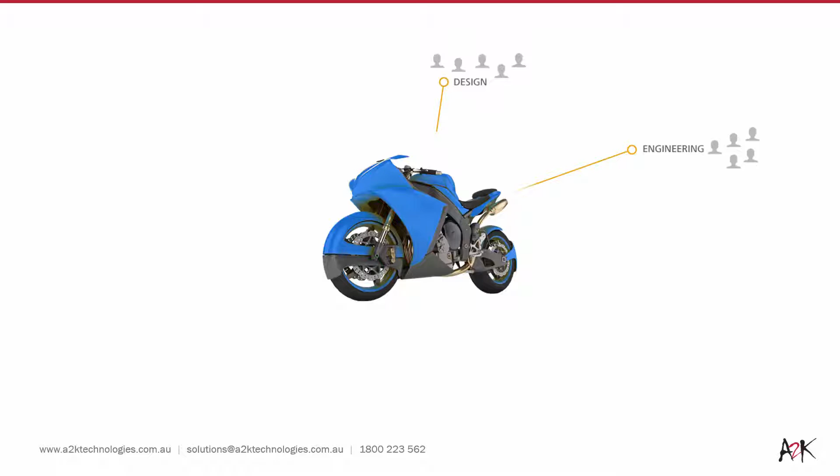The design software industry has typically served this target audience, the designers and engineers. But when you think about it, there are all kinds of other people that contribute to executing the whole project. And all of these people use different tools, and all of those tools create different artifacts and different kinds of data. And all the conversations, activities, and decisions that happen, which if they are even captured at all, create even more stuff to keep track of. Dealing with all this information can be time-consuming and in most cases inefficient. What's been missing from the design process is a good backbone to the infrastructure that manages all this.

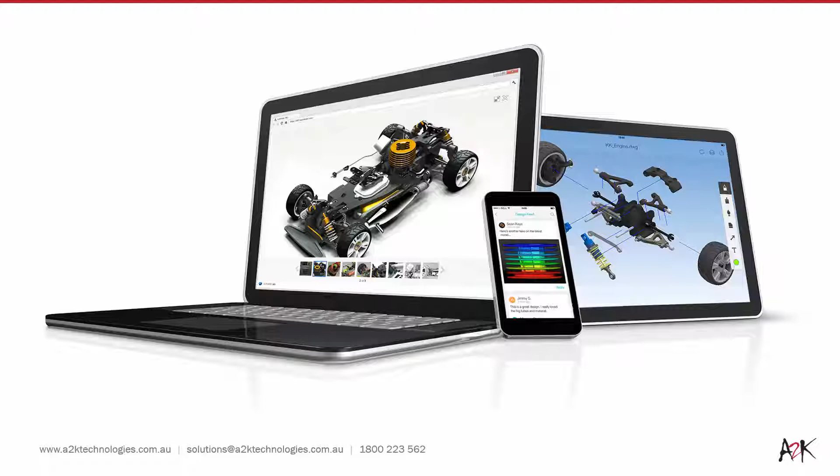Autodesk A360 has been developed to give people access to all the data, projects, and people that they work with on a daily basis. It provides a centralized workspace for design and engineering projects and acts as a platform for general project collaboration, as well as other Autodesk cloud-based services such as some of the existing A360 design, analysis, and rendering tools. This workspace is also accessible on just about any device at any time, whether it be desktop or mobile devices such as tablets or phones. The mobile platforms currently supported are iOS and Android. So let's take a look at the new Autodesk 360 platform.

A360 places the project at the center of the workflow. It connects people, centralizes data access regardless of the primary design tool, and records activities all in a single location. It organizes and provides access to all project information, not just design data. And it offers a simplified and easily accessible user experience on every device, bringing this information to the full project team. It's not just for designers, but for everyone, available anywhere, at any time, and on any device.

A360 comes in a number of flavors. A360 Drive is the free Autodesk file storage service which has been available for a number of years now. This was the previously named A360. It has very limited functionality compared to the other flavors, but still serves as a great file sharing tool. A360 Free is the new A360. It contains a number of the newer features such as limited project management for personal use. As you can see, it has limited storage capacity and only allows for a single project at a time.

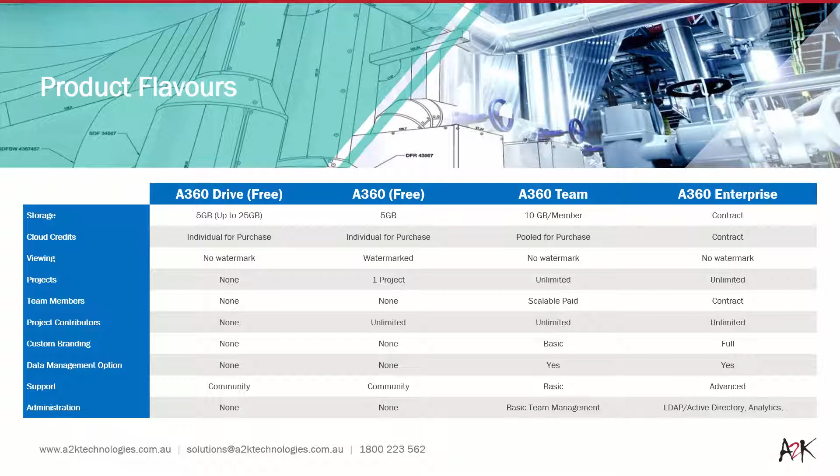A360 users are classified into a number of roles. The first group is for team. Team roles are specific to the overall portal. There is the team owner, who controls the entire A360 account, the team administrator, who manages the users and projects, and the team members, who are regular users that can join projects. When getting down to the project level, there are project owners, who are the project administrators, project moderators who manage the project, and the project contributors who are external users such as consultants and contractors who need to contribute to the project. To make the distinction clear, team members are internal staff and project contributors are external users.

When first logging into an A360 hub, the user is presented with their dashboard. Looking more like a social media service, the dashboard provides the user with the most up-to-date information. From here, the user can start drilling down to project-specific information. At the project level, information such as design files, scheduled engagements, and other communications can be accessed.

In essence, it's a mini hub. All project data, whether it be 2D or 3D, documents, photos, etc., can be uploaded into an organized data repository. Built-in viewers will allow the viewing of over 100 different common file formats, all without having to leave the A360 environment. Models can be viewed using Autodesk's new and powerful model viewer.

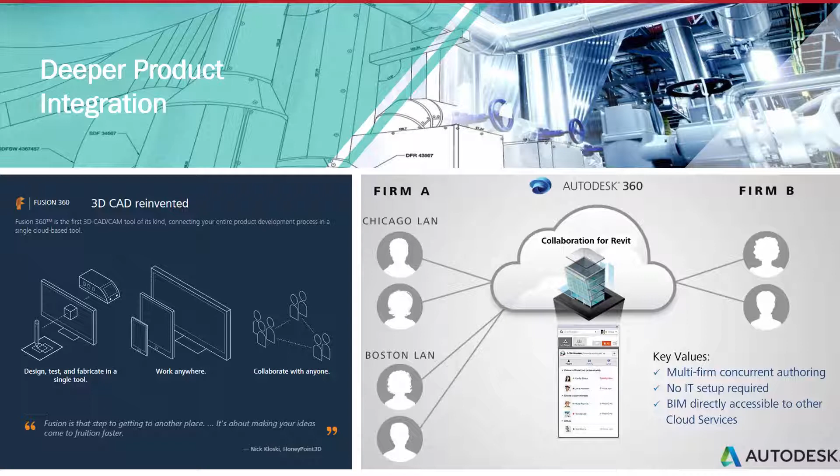A360 will also have deeper integration with Autodesk design authoring tools. Products include Fusion 360, which is already available, and Collaboration for Revit, which is currently North America only, but will be released in the ANZ market in time. The A360 platform provides the mechanism for other modules that extend the design capability to now be built on top.

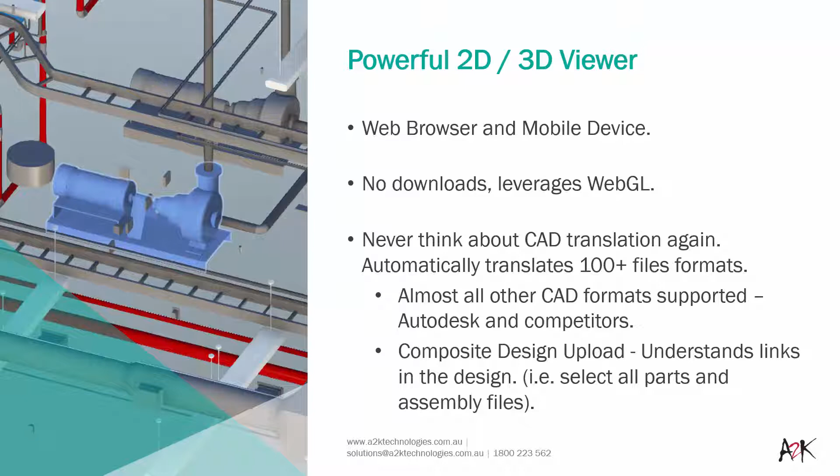To enhance the platform, Autodesk has been developing a brand new model viewer built specifically for A360. Without even needing to download any software or browser add-ons, other users such as clients will be able to effortlessly access design files through their web browser. Thanks to over 100 file formats being supported, models from leading software developers, not just Autodesk, can be accessible.

When users are reviewing models, comments can be added directly to the model elements to ensure the design process remains as seamless as possible, with additional markup capabilities coming in the near future. The next time the model is opened by another user, those same comments will become immediately visible. And lastly, all model metadata is searchable. This provides rich interaction with the project files, bringing visuals and data together as a single experience.

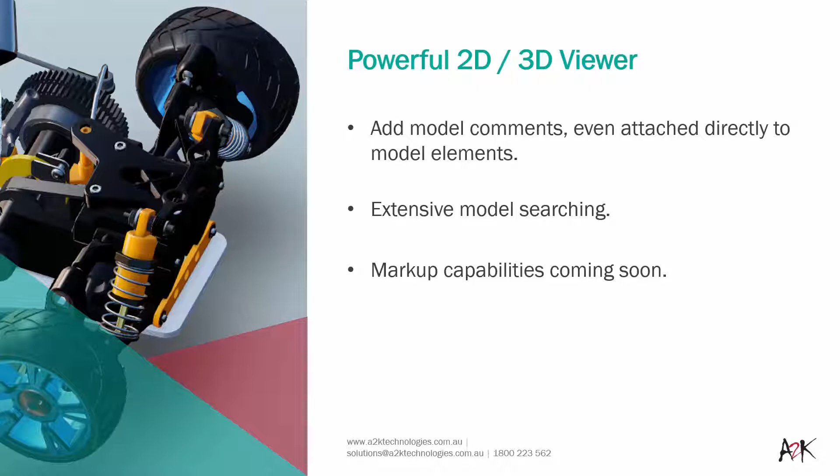You've no doubt seen or currently use various file sharing services, and these are great if all you need to do is share files with the project team. A360, though, provides the same simplicity of those other file sharing services, but with the added muscle to interact with your designs in more meaningful ways. Let's now take a live look at how all this comes together.

We are looking at the A360 user interface through a web browser. As you can see, we're currently on our All Projects tab. When we move up to the top right-hand corner, we can access our user account details. This location contains a list of all the hubs that we are connected to. You can currently see that I'm connected to the A2K Technologies hub as well as my own personal hub.

To the left of my profile button is the notifications. This contains a list of all the old and current notifications that I've received. You can see the only outstanding notification that I have is currently highlighted in orange. We can select one of the project links to take us to that project's homepage.

To the left are links that take us back to the homepage, to where the data is stored, the people that are currently connected into this project, the calendar, and any wiki pages that you need to access. In the center is the activity feed. This contains a list of all the activities that are currently being undertaken for this project. Let's scroll down to the bottom until we get to the very first activity.

As you can see, I've taken it upon myself to start the project. After the project was started, the lead architect was then invited into this project. After the lead architect accepted the invitation to join the project, they went to the calendar and started a kick-off meeting. They then invited the lead engineer and myself to join.

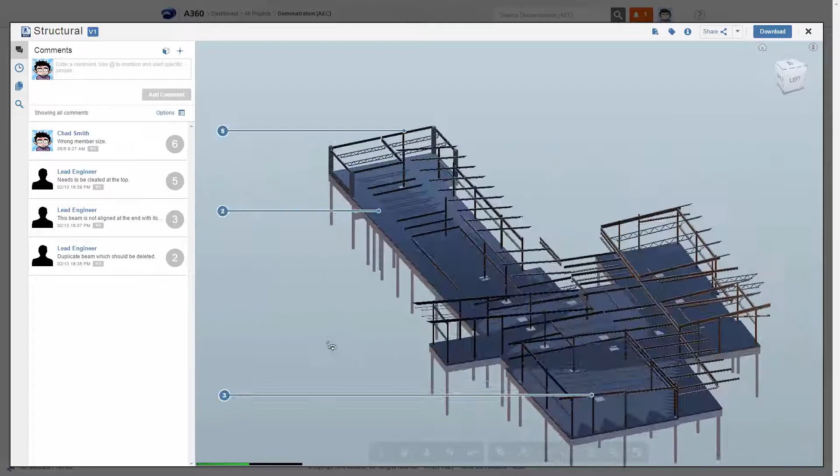As we can see, this model is not just static, it is interactive. Note that the performance of the model is quite good, especially considering this is within a web browser. The model viewer has been designed to handle massive data sets, so opening up those large project files shouldn't be an issue.

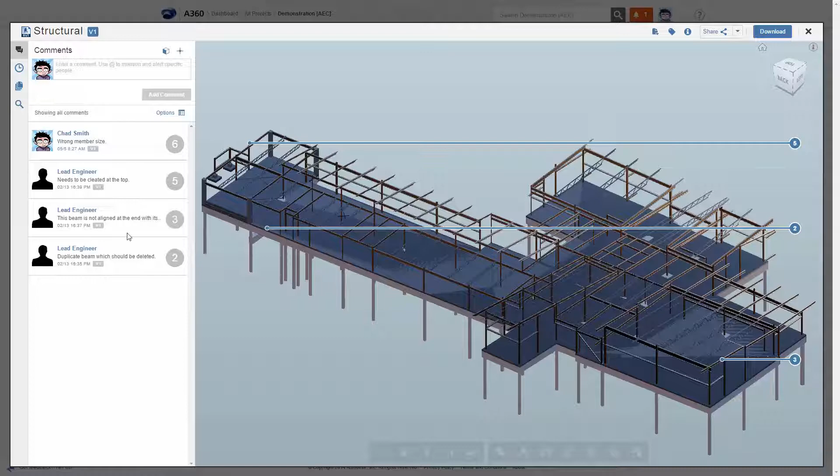Towards the right-hand side of the model, you can see some comment tags. These comment tags match up with the tags as noted over on the left-hand side where you can see the comments. When selecting the comment tags from the list, the model is reoriented to represent the model as it was when that comment was saved. You'll notice that the objects are also highlighted. That's because these particular comments have been noted as an object comment.

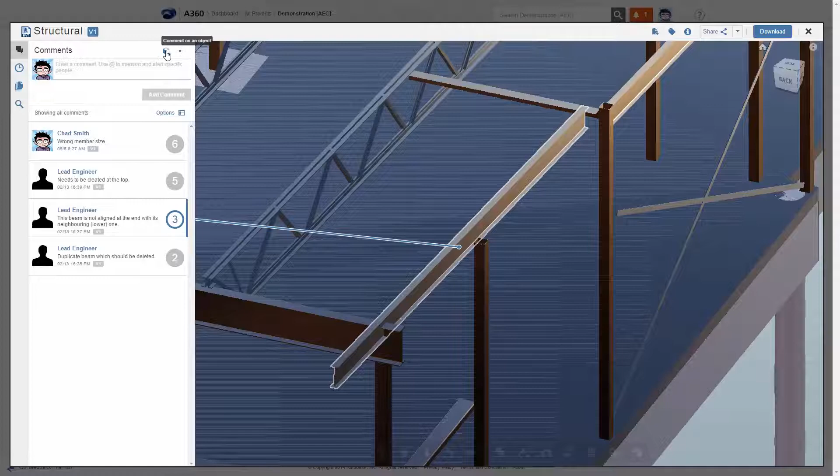Selecting comment number 5 once again reorients the model to show us the context. You'll note in this case that the comment is actually pointing to the top of the object rather than the center. That's because this type of comment is a point comment and allows us to pick an arbitrary location along an object as its reference.

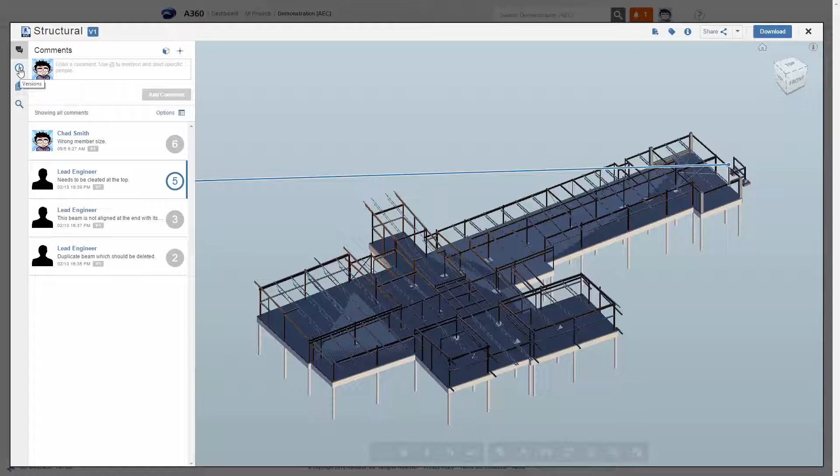Over on the tabs on the left, we have a version tab. This will show us all past versions and the current version for this model. Over on the left is also a search tab. This allows us to put in keywords in order to find those objects based on the object's metadata. In this case, we'll use the word girder because this is a known property as part of a Revit model.

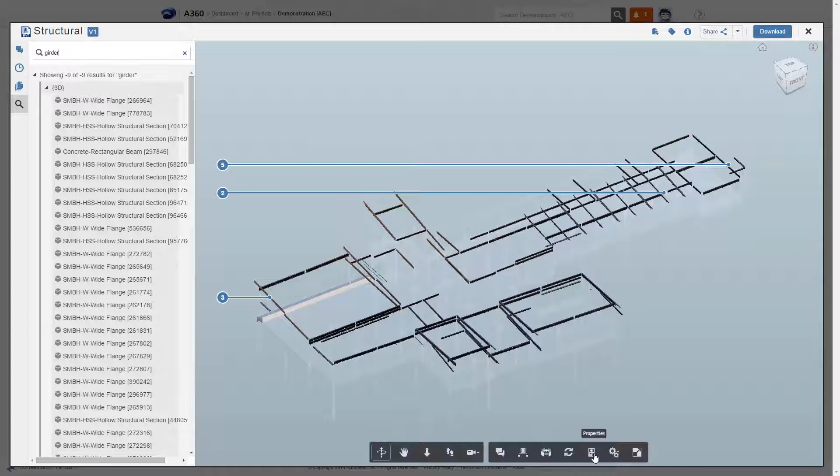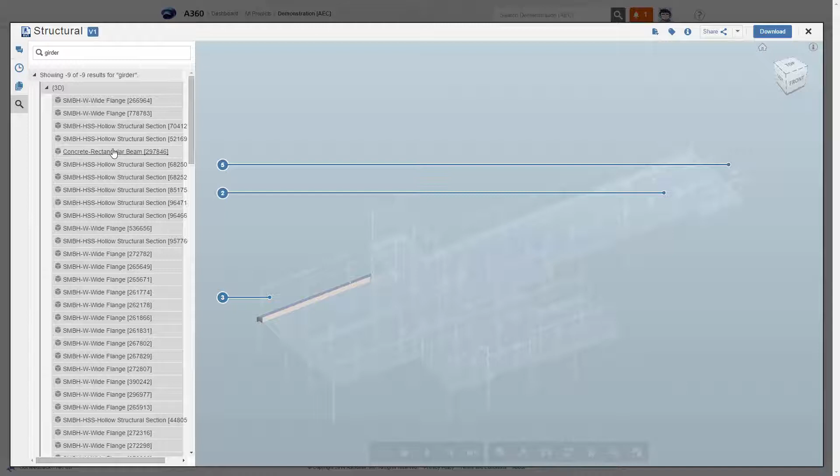Once the search is finished, you can see the found objects have now been isolated in the model view. We can confirm this by turning on the Properties palette and then selecting an object. As you can see, this object has the word girder in it. As we hover the cursor over the search results, those objects are then highlighted in the view. If we select those objects, then the model view zooms into the object.

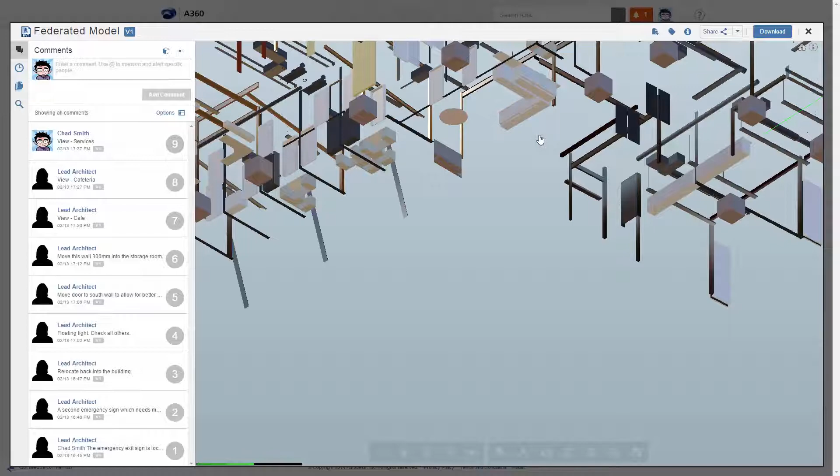Going back to the activity feed now, we're going to scroll back to the top of the list and select one of those featured files. This happens to be a federated model of all disciplines for the project. This project contains a lot more information and therefore takes a little bit longer to load. But once it's loaded, you can see there that the performance is much the same as the structural model that was previously opened.

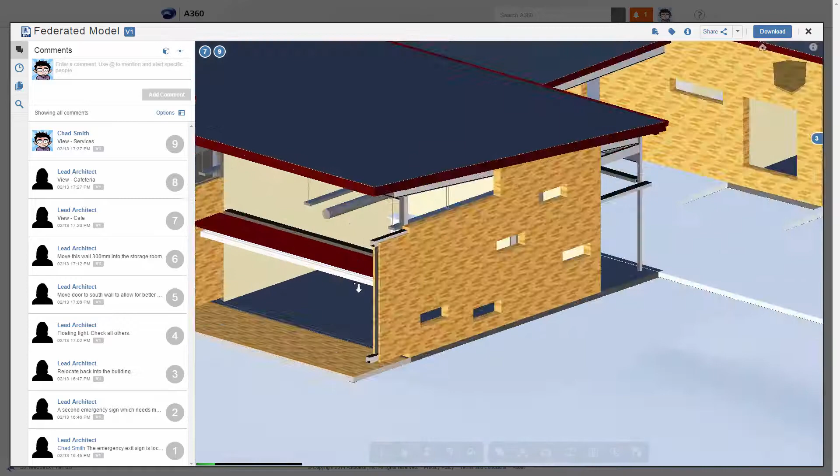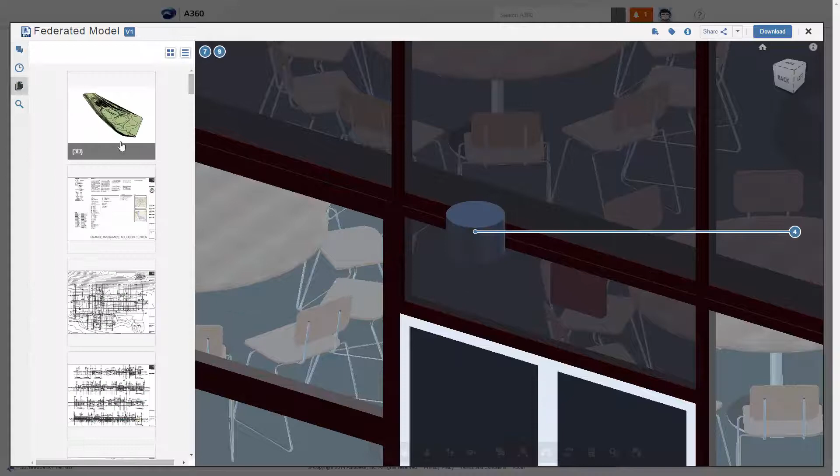This project also shares some similar characteristics, such as the comments that are listed over on the left-hand side. This Revit project, when it was uploaded into A360, also had some sheet views generated as part of that Revit project. You can see that those sheet views have been generated into interactive views as listed on the left. Selecting the sheet view will open it up, and it now becomes an interactive view. You can see the fidelity of the view is retained as this is a vectorized view.

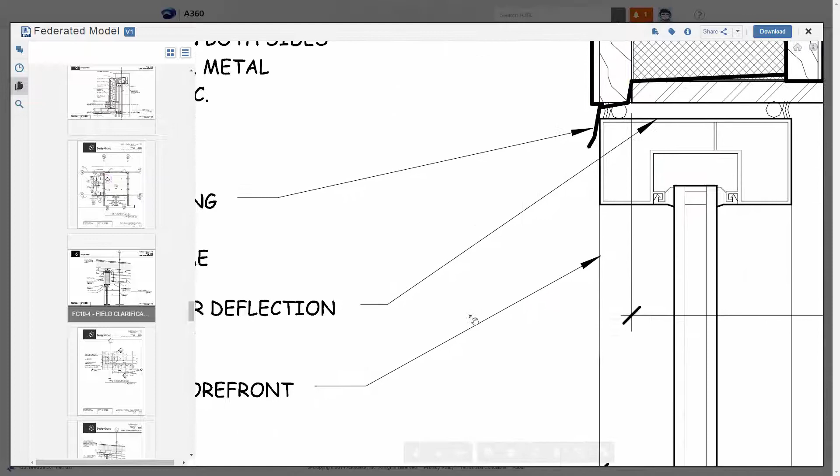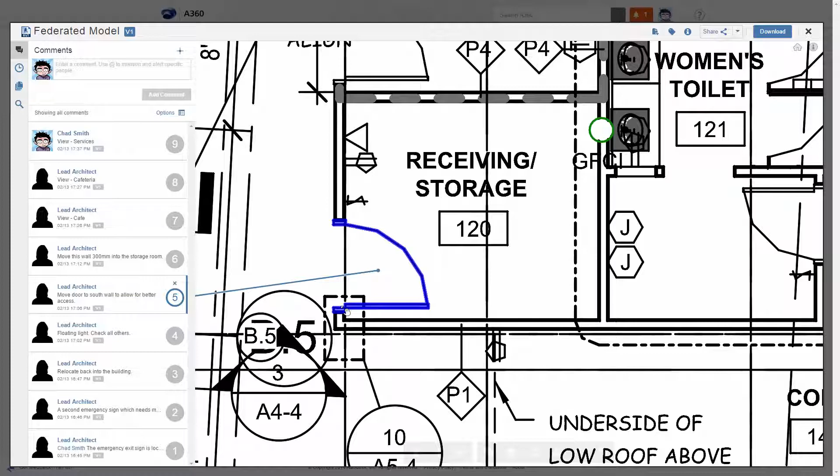This model also contains some comments that are related back to these sheet views. You can see, despite being on a different sheet, when we select the comment, it takes us to the correct sheet, zooms in, and shows us that object. You'll notice that these objects are also modeled objects, so that we can select them as well.

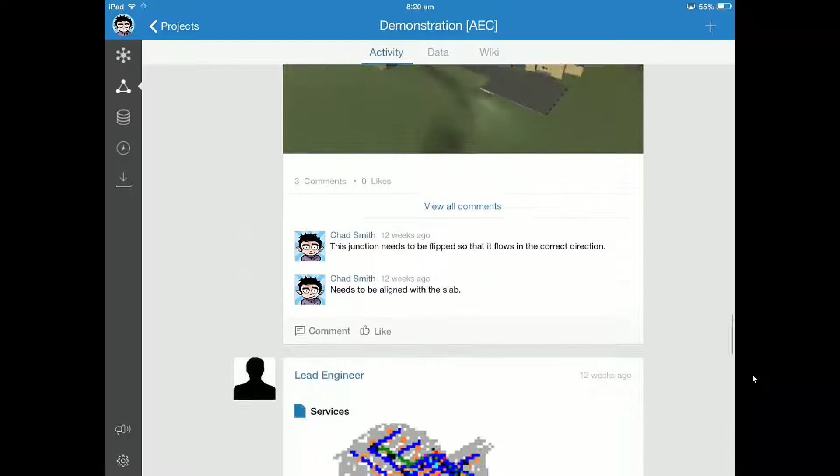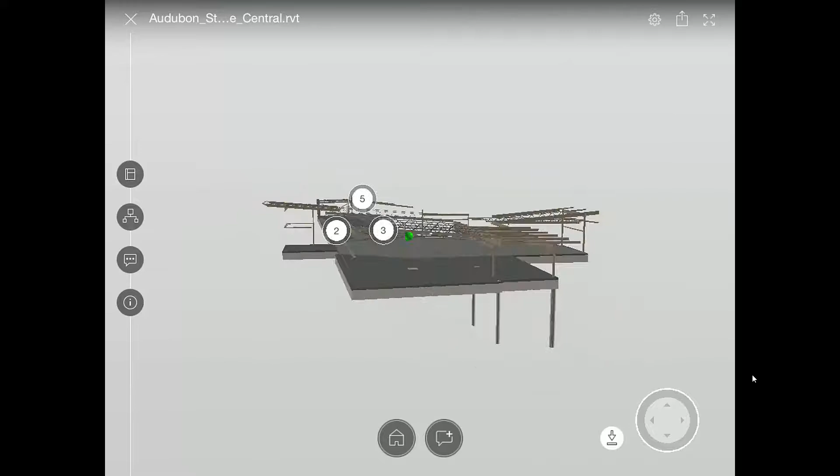Let's now move over to the mobile application. You can see here that the interface is very similar to that of the web browser. Let's take a moment to scroll through the activity feed until we get to the structural model that we opened up previously. Browsing the model is very similar to other mobile applications. We simply pinch to zoom, and using two fingers we can drag to pan. Zooming into the middle of the building now, we can use the joystick in the bottom right-hand corner to allow us to walk through the model.

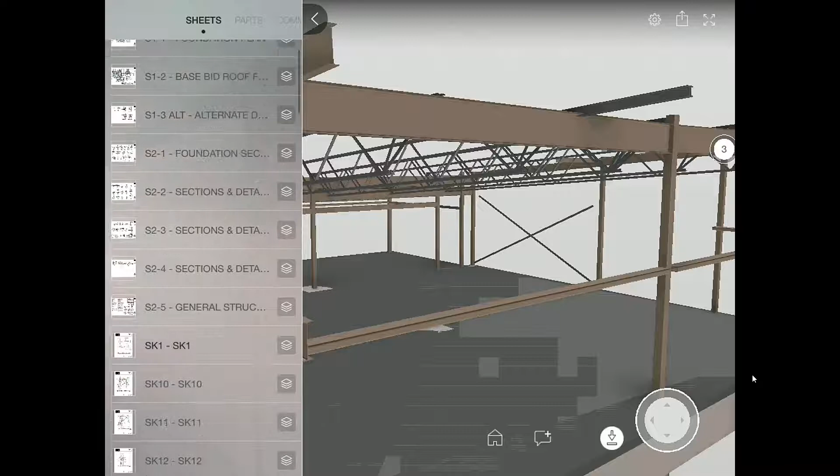Using the side menu, we can access the drawing sheets. When we select a sheet and then zoom in once again using a pinching action, we can see there that we have the same high fidelity resolution as though we were working in the design application itself.

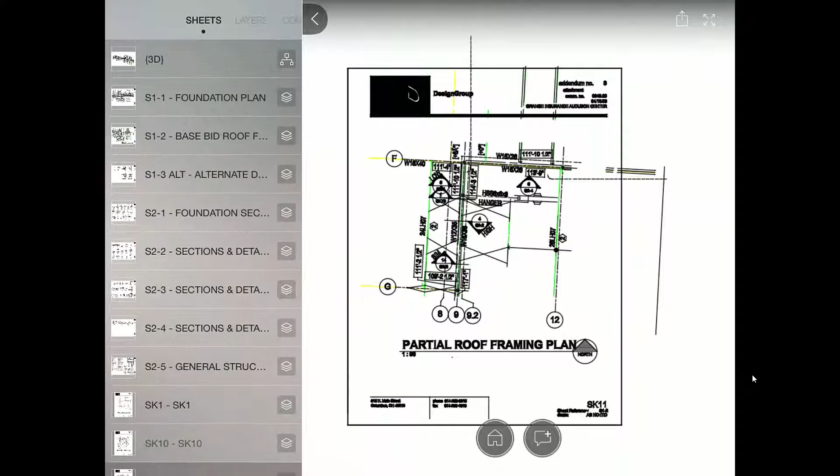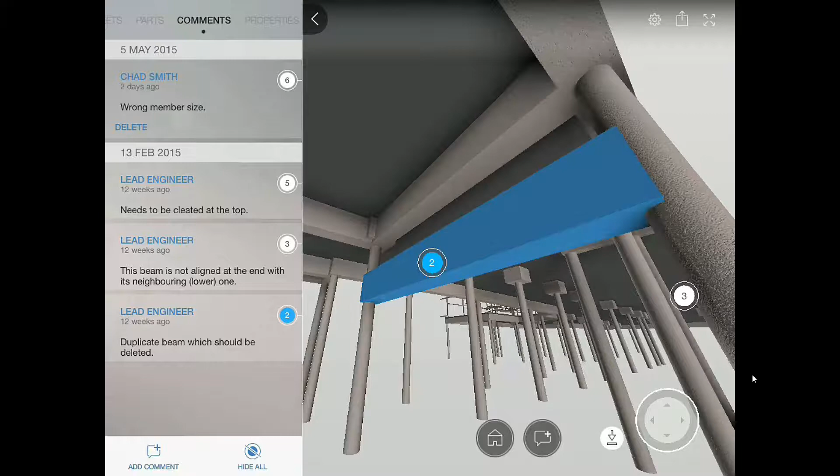Going back to the 3D model, we'll now access the comments. Notice it has the same comment numbering as what it had when viewing through the web browser. We can simply select these comments and the model will reorient itself to show us the object in question and highlight it. And of course, when you're out in the field, you can add a comment which will then be relayed back to those in the office.